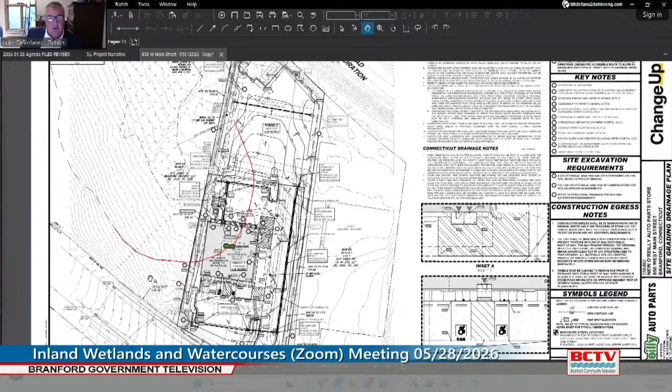So this is the site, and the red line is the area that I consider to be the major talking point for this evening. The site is proposed to be redeveloped as an O'Reilly Auto Parts store with a single access to and from West Main Street in front of the site. The back portion of the site is going to be subdivided off, creating 2 parcels. The site under the current condition is just shy of 2 acres. It's not going to be subdivided directly in half, but it'll be pretty close, with slightly more land given to the O'Reilly and the back half being used for...

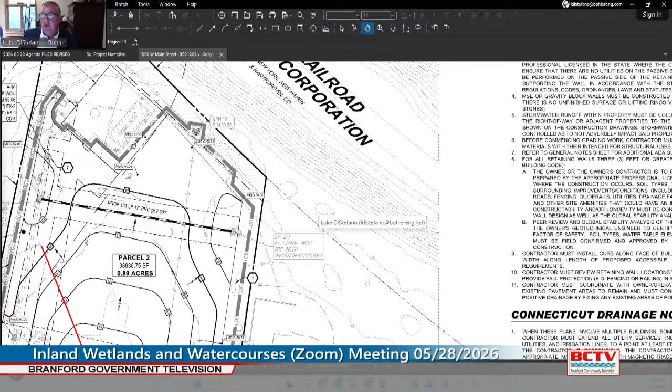The site, as I mentioned, is basically 100% developed today. There is also a cell tower located in the back portion of the site, that's existing. We're not proposing to make any modifications to the cell tower located in this portion of the site.

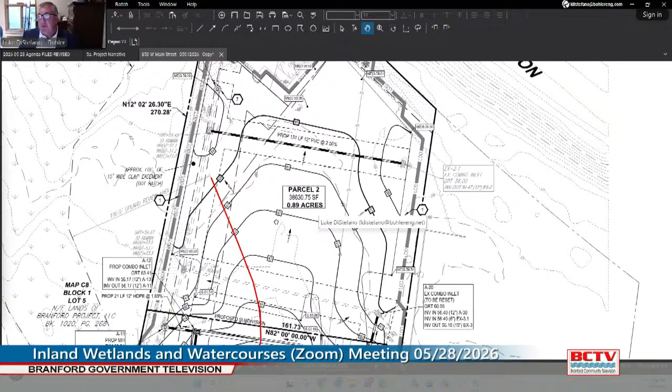As part of this plan, if you've had an opportunity to review the application or the plans submitted, we feel we're making improvements to the site that will actually enhance the wetland under the post-developed condition. We're increasing green space overall when you compare existing and proposed impervious and pervious cover, there'll be an overall increase in green space. Most importantly, we're enhancing the stormwater management system on the property.

Right now there's only a little bit of stormwater quality and stormwater management happening. But if you've had an opportunity to review the plan, you'll see we're collecting runoff from all impervious portions of the property, which will be collected via deep sump catch basins, conveyed to a proprietary stormwater quality unit before ultimately being discharged back to the wetland, similar to how it is under the existing condition. We've done some soil testing and identified D-type soils, so unfortunately the soils on site aren't conducive to any real infiltration, but we're looking to improve the site to the greatest extent possible.

Again, we're in front of this commission because we are doing work, about 18,000 square feet of work on the 2-acre site will occur within the 100-foot buffer, and that is why we're in front of the commission this evening.

So with that, I know you guys have a pretty full agenda, I'll open it up to comments from the commission. We did receive some comments earlier from town staff, none of which we think are major or insurmountable. We also have a meeting set up with the Planning and Zoning Commission happening next month, so we know there are additional reviews that will take place in connection with the project, but your commission was the first stop. I'm certainly happy to answer any questions the commission or anyone on the Zoom call may have.

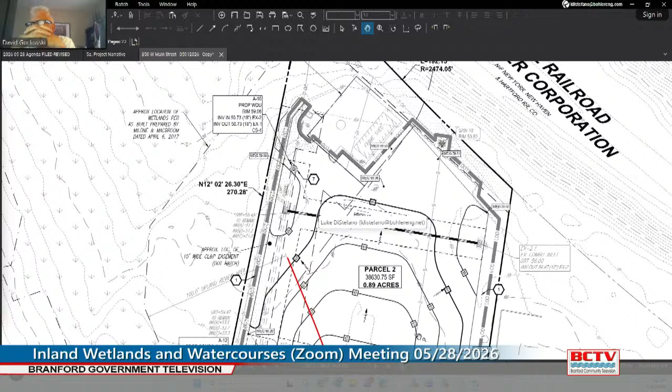Good evening, Mr. DiStefano, Commissioner Goklowski here. I'm under the impression you're going to be removing the existing structure on the property? Correct, everything on site will be, with the exception of the cell tower, razed and removed.

I'm very familiar with the history of this parcel, and there were some sewage issues, piping and sewer issues at one time when they were in operation.

Are you going to be removing the old plumbing currently on that structure? Correct, that'll be removed, new sewer line installed. Okay, thank you. You're welcome.

This is Commissioner Basserman. Can you go over the construction activities for the removal of the facility, and what protections are going to be employed to protect the wetlands during this removal?

I can't speak specifically to the demolition practices, that's means and methods, but it'll be a typical demolition by a licensed contractor. We have a soil erosion and sediment control plan that we submitted with the application, so we'll have safeguards in place to prevent sediment migration, erosion, or any pollution making its way into the wetland during construction.

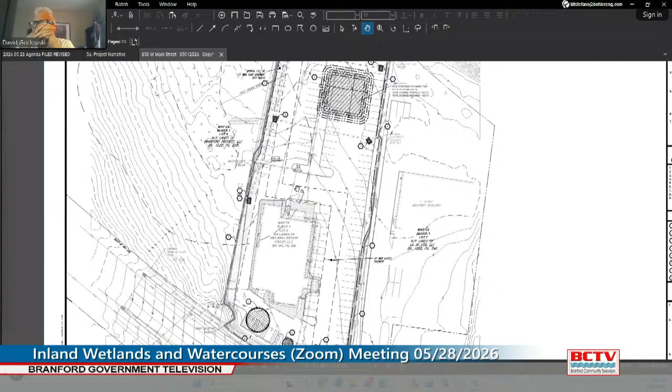I had a quick follow-up question regarding the rear parcel. I believe as part of this proposal it's proposed to be crushed stone or gravel, and there will be some catch basins installed in the rear. So I was curious what that would look like from a durability of the catch basin frames standpoint, and also from preventing stone from entering the system.

It's possible that post-construction, if it is left as a gravel-based area prior to being redeveloped, like with any catch basin, there's a possibility of stone, but with the deep sump, 4-foot sumps in the various catch basins, and a long-term operation and maintenance plan, those will be monitored just like any catch basin on any active site. If it's identified that they're full or collecting debris or sediment, they'll be cleaned as needed, similar to any long-term operation and maintenance.

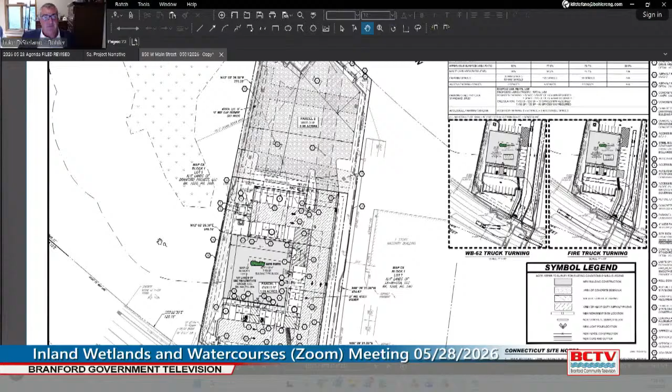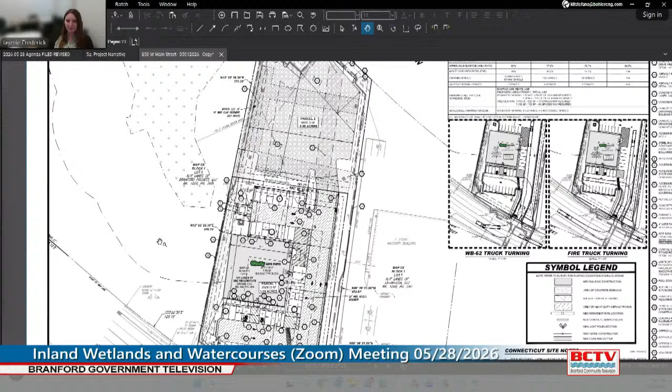Jaymie Frederick, the Wetland Agent, just to follow up, for clarification for the commission, the town engineer did get review comments in on this application that were distributed to the applicant today. I was not able to draft a staff report. Olivia put a lot of legwork into starting one, but I didn't feel it was as comprehensive as I typically like a staff report to be before releasing it to the commission.

I wanted to backtrack. I know one of the town engineer's comments was regarding the stormwater quality manual, and essentially the fact that the maintenance identifies 2 different options for the maintenance. I was wondering if the applicant could speak to that. I know you mentioned you saw the comments. Did you have a plan to resolve that point in particular?

Generally, we leave that up to the various commissions. Traditionally, 2 times a year is plenty for inspections of these types of systems, these stormwater management items or BMPs. If quarterly is preferred, we can do that. That's not a problem. For a site like this, the size, the type, the operation, we don't feel quarterly is necessary, but if it's 4 times a year, that's fine. If it's 2 times a year, that's also fine.

What's in the plan today regarding the maintenance? It mentions 2 different time frames for different portions of the BMPs in place. I think the catch basins are quarterly, and I believe the stormwater quality unit was twice a year, but if you want one uniform inspection rate for the entire system, that's fine.

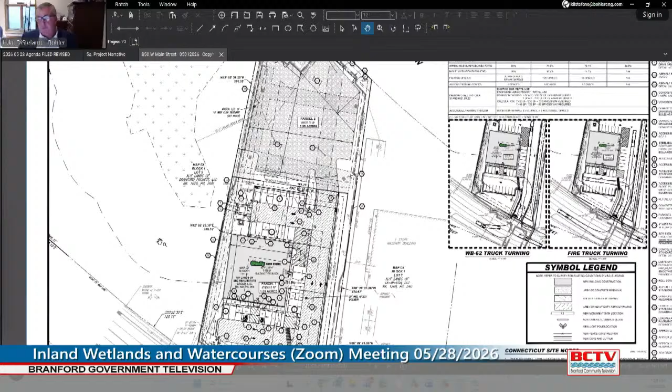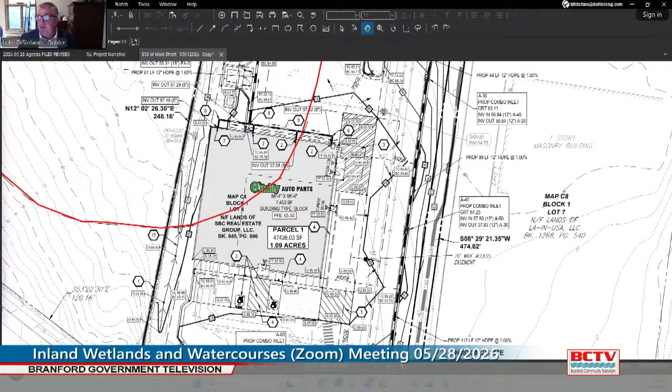I guess I'd like to see that visually. So if it's on this plan, can you blow it up a little more? It is, again, it's going to be difficult to see. Let me see. We don't always show the actual catch basins, but you can see right here what we've done. This may differ slightly from what's ultimately constructed in the field, but you can see all the runoff from the roof is directed into a series of downspouts on the north side of the building. That'll be collected and conveyed into the stormwater management system here prior to making its way southerly into the water quality unit and then ultimately back into the wetlands.

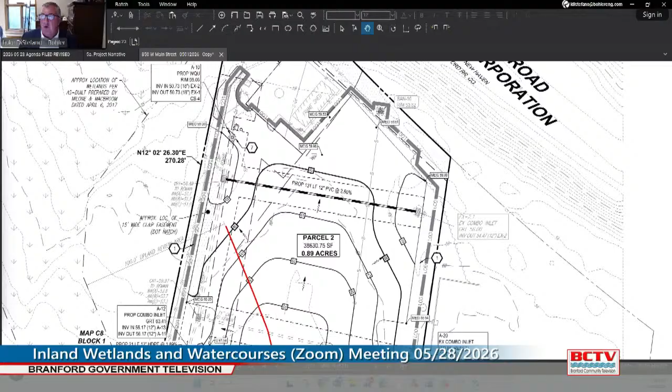So even though the runoff from the roof is, quote, clean runoff, it'd still be pre-treated like runoff from the other impervious portions of the property will be. So it's another safeguard over the existing condition.

This is Commissioner Bassermann. I'm a little concerned with the comment that what gets done in the field may be different than the plan. The architect may change where the downspouts are on the roof, but we will still collect 100% of the roof runoff and treat it the exact same way. Visually, we're showing it with 4 downspouts on the north side of the building, which we believe to be how it will ultimately be constructed. But it is possible that between now and when they build that building, the roof line could change, the gutter locations may change, but it doesn't change the intent of the stormwater design and how all runoff that hits that roof will be ultimately treated prior to being discharged into the wetland.

This is Commissioner Goklowski again. You said you're going to improve the impervious conditions on the property. What are you going to do with the second parcel? Are you including what your plans are with the second parcel, or are you just concentrating on the parcel that is going to be developed at this time? No, we looked at the entire site as if it was being developed. We knew it was going to be developed at some point, so we've designed the stormwater management infrastructure to handle 100% of the current site, with the rear portion of the site being effectively almost 100% impervious, which is what we looked at when we considered the overall site.

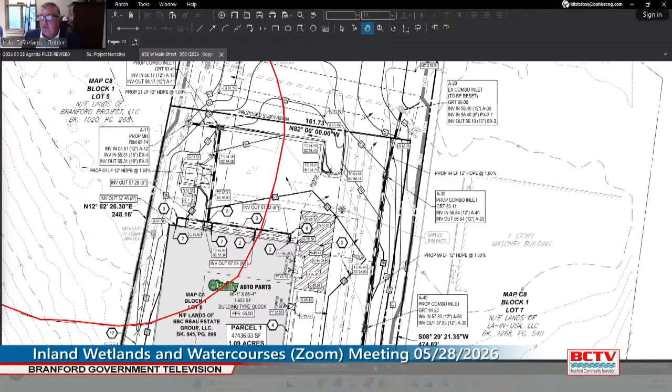This is Commissioner Bassermann. Is there any stockpiling on the site? I'm sorry, could you repeat that, sir? Is there any stockpiling on the site? We showed some areas on the sediment and erosion control plan for potential stockpile. That's going to be up to the contractor, more of a means and methods thing than anything else. But we did show an area for stockpile here, surrounded by erosion and sediment control fabric, so that if they do stockpile, similar to any other construction site, it'll be monitored and done in such a way that it prohibits any type of soil migration or sediment movement offsite.

This is Commissioner Begman. You're going to take up a lot of old asphalt. Can you speak to where that's going, if it's going to be stockpiled, if it's going to be brought off immediately, where it'll be stockpiled, et cetera?

Again, that's a construction means and methods thing. That'll be up to the contractor chosen to demolish the site. I could tell you in other locations like this, it'll be taken off-site unless it can be reused as fill or structural fill. But generally, that type of material is taken off-site to an approved disposal facility and disposed of according to all federal, state, and local regulations.

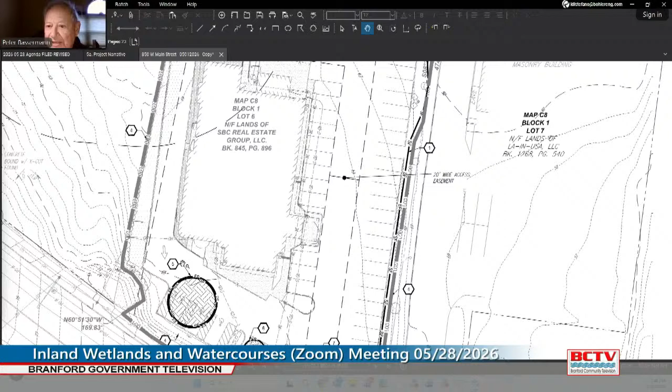And again, I'd love to be able to speak to other applications and other applicants. I don't know if those applicants had contractors already chosen, if they had preferred contractors that do all their work. Again, there's a lot of variables. I've been designing and permitting sites in New England for 31 years, and in 99% of the instances, this level of detail on plans is more than enough, whether it be inland wetlands, whether it be planning and zoning boards of appeal.

But again, we're not looking to dodge the question. I'm just telling you at this point in time, we don't have that information, but we're happy to provide it when we can. Jaymie Frederick, the wetland agent.

I'll just speak to that point. I think the main concern the commission has relative to stockpiling is the extent of stockpiling on site. Oftentimes plans will initially come and they'll have a small circle, and then the site development comes and it's a much larger stockpiling area. So I think the main concern is whether the stockpiling area is appropriate for what's likely to be stockpiled on site. And the other question is whether asphalt millings will be stored on site, because oftentimes the commission will want to see that maybe be a covered stockpile to help reduce leaching of chemicals from the increased surface area of the millings.

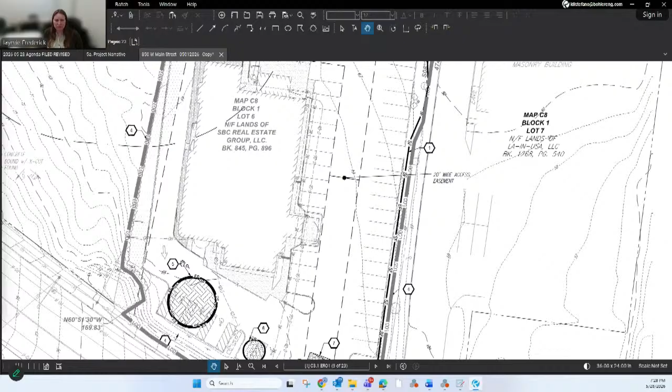And the main thing for consideration is making sure that the stockpile doesn't move in proximity from where it was proposed on the site plan to the wetland, and also that we don't end up with stockpiles on top of catch basins, which ultimately drain into a stormwater system that goes to a wetland area. So I think those are the concerns the commission's looking to address.

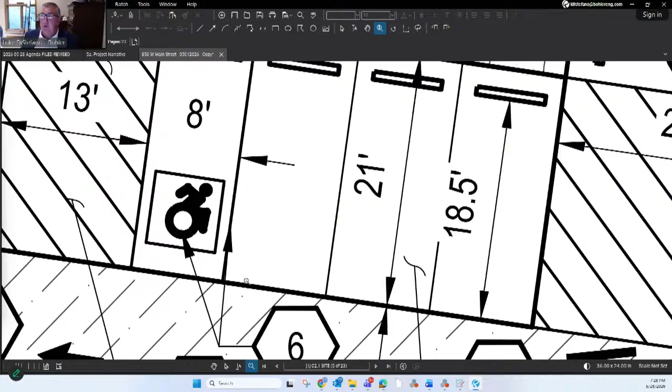Well, my computer's not behaving here, but I can tell you when we lay these things out, obviously we put the stockpile as far away from the wetland buffer as we could. We also have to remember this is a very small property that's being redeveloped. It's currently 100% developed today. We are not modifying grading and drainage to any great extent.

So we don't anticipate huge stockpile areas on site. This isn't an undeveloped site where we're going to be coming in and cutting into huge slopes, that type of thing. We also have a site that is very tight for everything that's going to be happening. When you consider there's going to be construction equipment, they're going to be putting in a building, there's not a lot of room to be maneuvering around here.

So we place the soil stockpile area in an area that, in our opinion, is as far away from the wetlands as it can be. It's going to be in an area that's conducive for the contractor, so that it doesn't interfere with other construction activities or equipment occurring on site. But we're certainly happy if there are certain requirements the commission would like to see, such as some type of material underneath any stockpile, or additional provisions beyond what we already show on the soil erosion and sediment control plan. We're more than agreeable to having those added to any condition or decision the commission sees fit to offer this evening or at any appropriate point.

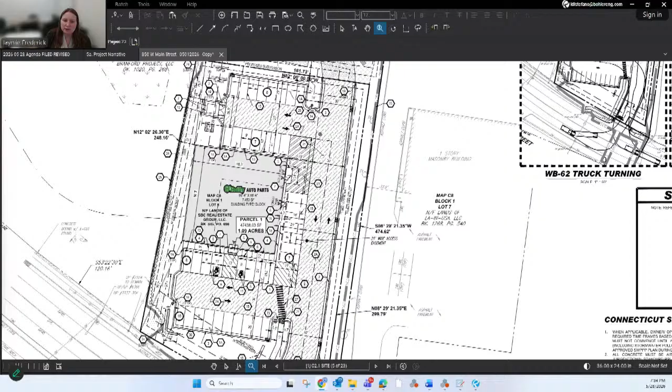This is Commissioner Bassermann—it sounds like it's not ready for prime time at this point. There needs to be review by both wetlands and planning and zoning, and you're kind of wearing both hats these days. So I'm going to make a motion that we table 26-16. Before you do that, Peter—yes. Can I interrupt you and stop you? I just want to point one thing out and see if any commissioners have other questions, so that if we continue this, hopefully everything is ready to go at the next meeting and the applicant can move forward without being held up. So I want to point out a couple things, and perhaps give the applicant a moment to address any follow-ups they may have before we continue.

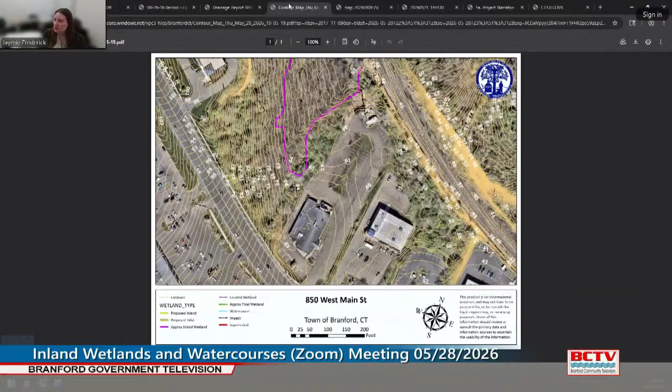So Olivia did two GIS maps, which are in the application. She's got one with an aerial image and some contours and the offsite wetland area that was delineated as part of an application for the abutting property. We do not have a wetland delineation, but there is a wetland area to the rear of the property to the east as well, approximately in this area. It is off-site, so we wouldn't require the applicant to delineate it.

I do have a couple of photos from when I went out to the site. You can kind of see the backside of the lot, by backside I mean the side opposite the entrance. And this is the property line that abuts the wetland area you see here. So this picture we were just looking at is approximately in this area.

It does look like the wetland might be a little bit more extensive. Again, it appears to be mostly off-site. I'm not entirely sure if there's a little bit of wetland area that perhaps extends onto the subject site. Presence of phragmites is not a wetland indicator, but the plant does tend to grow in wet areas.

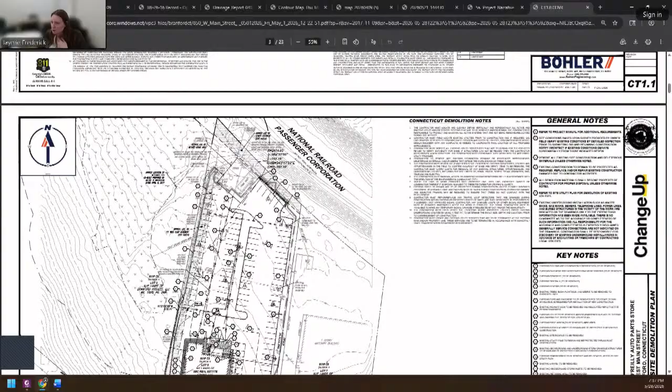Commissioner Besson: Jamie, that last picture you had, how close is that to the property line, since you said it's off-site? Jamie: Honestly, I'm not entirely sure. But this catch basin here... Commissioner: Yeah. Jamie: ...is this catch basin here. Commissioner: Oh, okay.

But I will note that when I was out there, there's a very small portion of this lawn that seems like it would be graded to potentially flow to this catch basin, and the rest of it is graded away from the subject site. And that's shown in the watershed calculations.

Any questions on any of that from commissioners?

Commissioner Bassermann: Would it be your intent, Jamie, to put those questions and comments into some document and forward that to the applicant so it can be reviewed for the next meeting? Jamie: Certainly, we'll follow up with the applicant. I'd also like to provide them the opportunity to see if they have any comments or questions while we're all together.

Commissioner Begman: I like the idea of the project coming back when the contractor is known, so we can be told what the erosion controls and sediment controls specifics would be. And I had a question, is there a provision for where in the paved parking areas the snow removal will go, and where the snow piles are going to be piled? That's a question for the applicant.

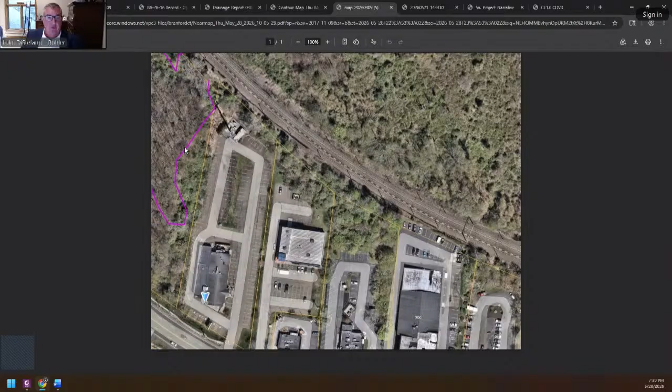Well, I believe the snow storage areas were shown on site, but I'll make certain that when we come back they will be, if they are not. But generally they'll be in landscaped areas as far removed from the wetland as we can, unless it's a specific requirement by the commission that there be no snow storage within the buffer, in which case we would keep it entirely outside, but generally it's going to be in landscaped portions of the property around the perimeter.

And then again, in instances where we have tighter sites like this, if the commission deemed fit, we have in the past agreed—I can't say we would right now, we'd have to take a look—but we have agreed to have snow removed entirely from properties during heavier storm events. Traditionally though, we're able to find plenty of room to mitigate snow and keep the site operational at the same time.

I would, however, ask about that comment you made relative to coming back once a contractor is chosen. I'd prefer not to have that as a condition, because we don't know when a contractor will be chosen.

This site, depending on how long it takes to be permitted, funding—we have no idea when a contractor will be chosen. But I can tell you, despite a contractor being chosen, if there are specific issues the commission wants to see, or specific items put on a plan, or conditions in any approval, we're happy to deal with that. It's not something we're looking to shy away from, it's just something that right now I can't provide.

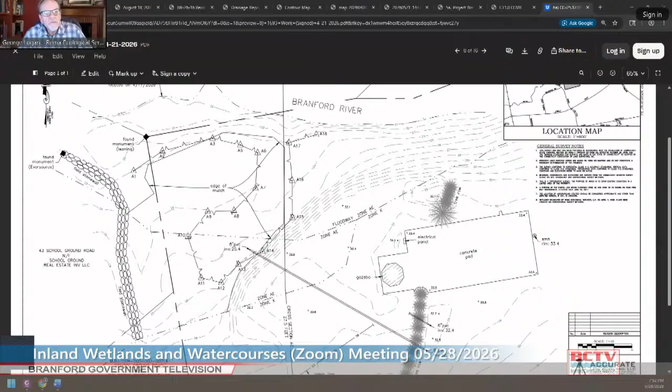within two features that are regulated by, I guess, the federal government and also by extension, the town itself. So the first thing I want to point out is that there is a vertical line you see that goes from top to bottom, this cross section, and it has an elevation on it,

and that says 27.5. That's a sort of an indexed line that came directly off the FIRM FEMA maps, which I've also looked at, and so our surveyor was able to put it as close as possible to where it is. Then you will see two other lines that kind of join together right there.

So you have a floodway, and that's the line that goes east to west, roughly. And then off that, the Zone AE diverges, and that's the floodplain line. So that's a 100-year floodplain.

Now, in talking with the town engineer, and Jamie, I think, also has had a discussion with him, there are two issues here. The first issue is that it cannot happen that we have fill within the floodway. That's not allowed. So if that mapping is correct, then that portion of the fill would have to be removed.

As far as fill within the floodplain itself, that's the Zone AE, which is based on an elevation. By the way, the elevation is roughly plus or minus a few inches on the site, maybe a foot, maybe a half a foot, 27.5 -- you can see that we don't exactly match 27.5 on the east side or on the west side.

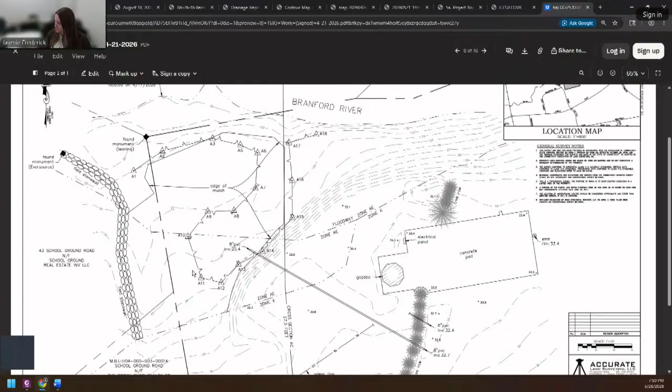Now that I think we have all the appropriate parties, so just for clarification on 2614, 509, before we move on, just for quick clarification, continuing the show cause hearing to the June 11th meeting. Correct. Okay, thank you.

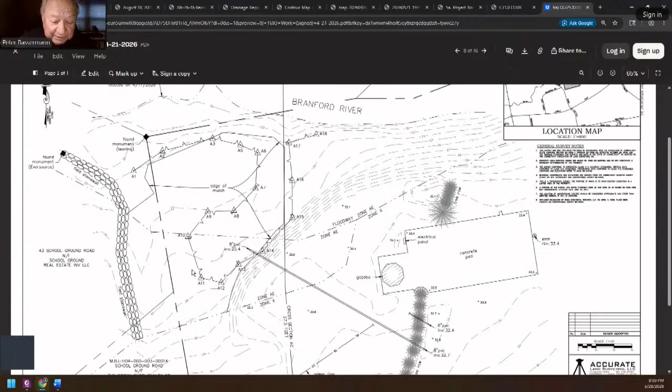509, 545 East Main Street, and 6 to 12 Business Park, installation of a swale, which is a continuation of the May 14th meeting. Let's see, we have all the parties on board. Let's try this again.

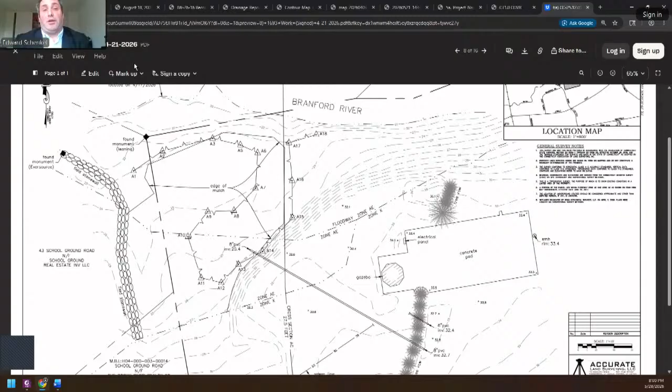Good evening, Edward Schenkel for the applicant 509 Branford LLC. I'm here with Mr. Stephen Trinkus, our professional engineer, and Mr. Foss, our LEP, is also here, available for questions. I'll speak quickly and then turn over to Mr. Trinkus. But I can represent that I have spoken to Attorney Deacon, who is counsel for the other applicant, the co-applicant, 612 Business Park Drive, Stony Creek. And he did state that Mr. Brown and Mr. Clutch are not pursuing those concerns that they raised before and that they will not be attending the meeting tonight, which they are not. I can represent that to the commission.

To the extent that Mr. Brown's comments need to be addressed, I'm going to turn it over to Mr. Trinkus, who can talk about that and answer any other questions for the commission. And then I'd like a few closing remarks as well. Sounds like a plan. Okay.

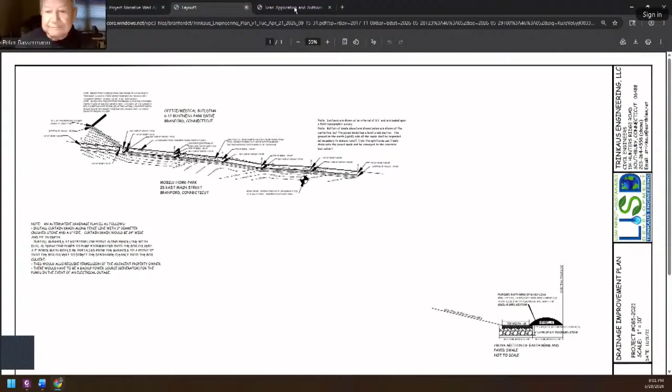Steve Trinkus, for the record, professional engineer from Southbury. A lot of Mr. Brown's comments dealt with more of the stuff on the Clutch property. He did at the meeting ask, could you infiltrate water farther up on the site? Our LEP did provide a map to staff showing the extent of the impermeable liner above the questionable environmental fill that was used here.

But you just can't infiltrate on this site, even above the liner, which goes about halfway up into that field. When we did the site walk, we parked on the lower driveway, and when we looked uphill, that lawn area, the liner appears to go about halfway up between the roadway and the units on the north side. But even if water infiltrated above that, it would have gone underneath the liner and into that contaminated fill, which is what you don't want. When I was on the site a couple of years ago, these lawn areas, while they are lawn, the soils are also very compact, pretty much almost one step away from being pavement, so rainfall just runs off of them. It's not infiltrating.

We went over the swale in the field, which is basically to provide a smooth, uniform flow path from the western end of the mobile home park, heading back east and then turning into the end of the box culvert, so that rainfall falling on the mobile home park as it runs down to the southern property line will now have a path that it can flow and get into the box culvert, and basically eliminate the flooding that has occurred in this lower end of the mobile home park. That's the whole purpose of the swale, is just to provide a smooth conduit for the water to get from point A to B.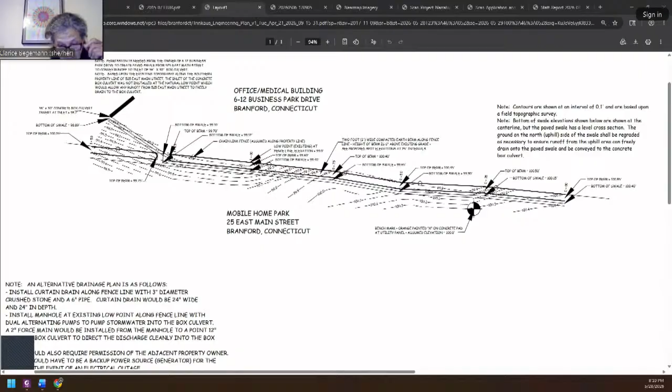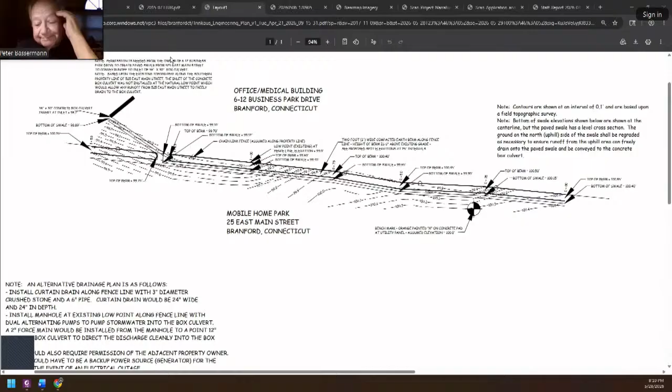Jamie, this is Commissioner Bassermann, you have a staff report for this? I believe we went over the staff report at a previous meeting and continued for the site walk, so I'll skip over. I think the other thing of note is the erosion controls and how the inlet, the culvert, box culvert will be protected during the construction of the swale and associated berm.

The outlined recommendations in the staff report are required inspections for the stormwater drainage structure, installation and final inspection, which would probably happen at the same time, standard conditions and general provisions in the issuance of all permits. I think based on the discussion this evening, the commission might want to also add a condition such as maintenance details as outlined at the May 28, 2026 meeting by the project engineer shall be added to the site plan. And then I don't know if you want the engineer to refresh the commission on how the box culvert will be protected, if there's any measures that should be installed, and what that would look like relative to the plan.

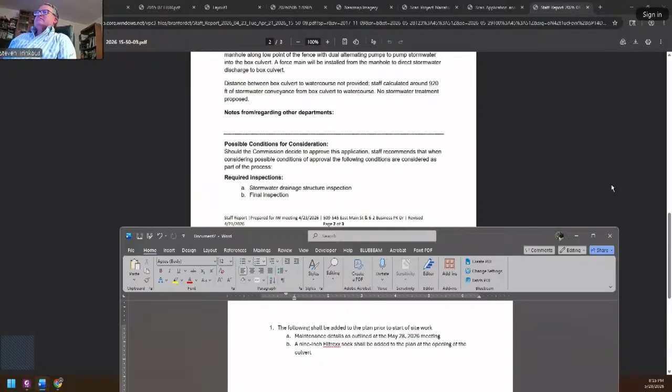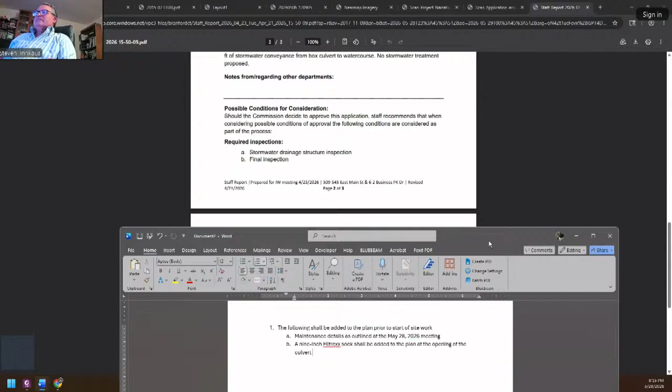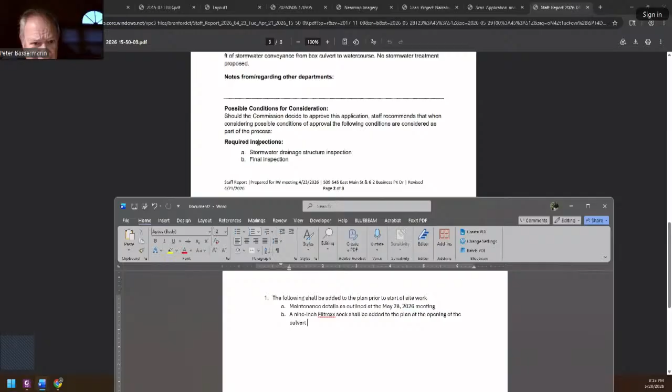This is Commissioner Bassermann. So Jamie, I understand this would be under possible conditions for consideration number 1, and then required inspections would be number 2 or something? You know, typically, I think based on Olivia, maybe you can help me on this one. I think required inspections might be condition 1 in our new system based on our template, so maybe this would be condition number 2. Do you recall, Olivia, how it's structured?

I think maintenance would be number 1, and then the Filtrexx sock would be number 2. Do we count the required inspections as a condition? No, but I don't know if the commission wants to see a revised version. Prior to start of work and following shall be added, and shall be reviewed and approved by the duly authorized agent. I think that's the information presented this evening, so it's just a matter of making sure. Sometimes we need an erosion control inspection, I didn't put it there when I was initially drafting it because there were none proposed, so I'm not sure if we want to add that.

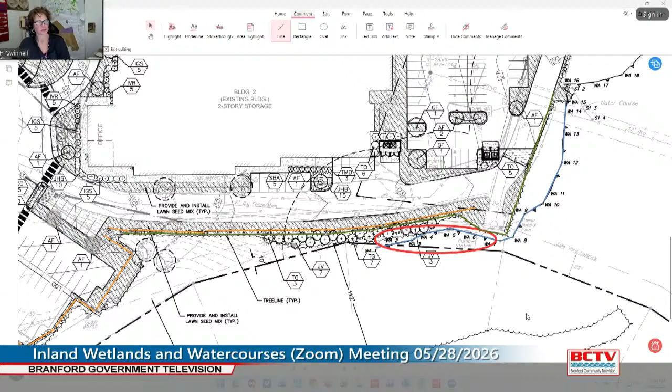Yes. Okay, so there was some discussion that some trees needed to be cleared. Jamie had conversations with the project manager at the time that they would be limbed, and I specifically asked, when do you guys have that planned? This was during the wintertime, there was still snow on the ground. They were not ready to schedule it at that time. However, I was informed that they would reach out and give me a heads up so I could go see the area that they were actually going to clear.

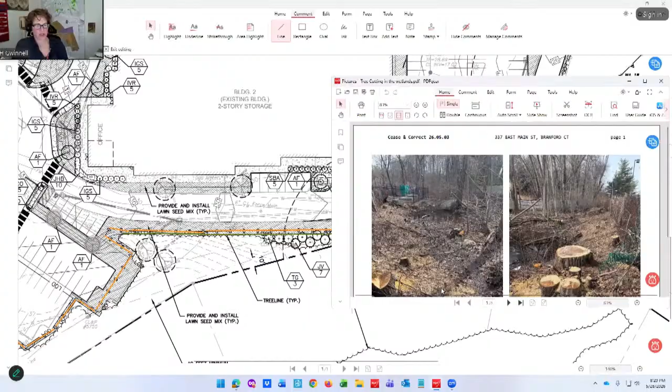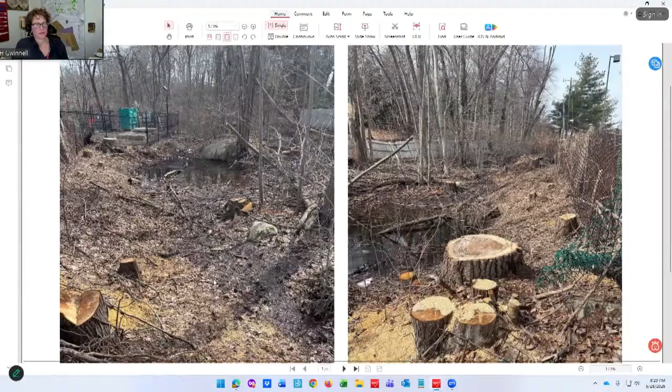Probably a few weeks after that, I hadn't heard anything. I was again doing a routine inspection, and when I arrived, this entire area was not just limbed, it had been cleared. So I do have some pictures. This is what I saw when I went after. This is where the trees had been that we were informed would be limbed. This was the result, and it obviously went deep into the wetland area.

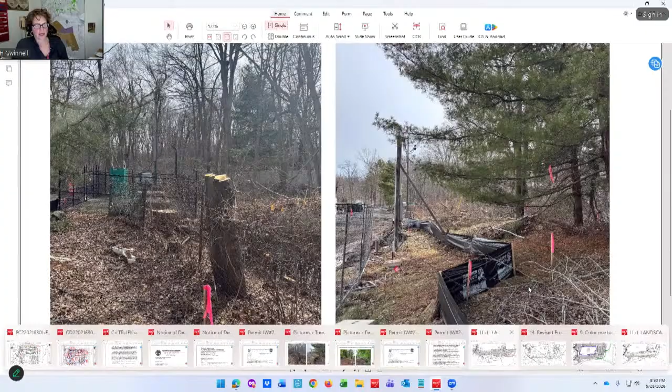I did have conversations with the superintendent on site, the previous one, they switched out, the new one, and the different project managers. So everyone was aware that this was something that was going to have to be addressed, and that they would be receiving some kind of a cease and correct order in order to remedy this.

The follow-up, what you're seeing now, is slightly different than the previous one. I think if you can see this, we have the orange line, which is actually a fence. In the last 4 days, the fence has moved, or has begun to be installed. Again, there was a conversation before this sort of went in, saying why are we putting the fence over here. So I also would like to bring up to the commission that during this discussion of the wetland area, they also altered the direction of the fence, which I have pictures of here.

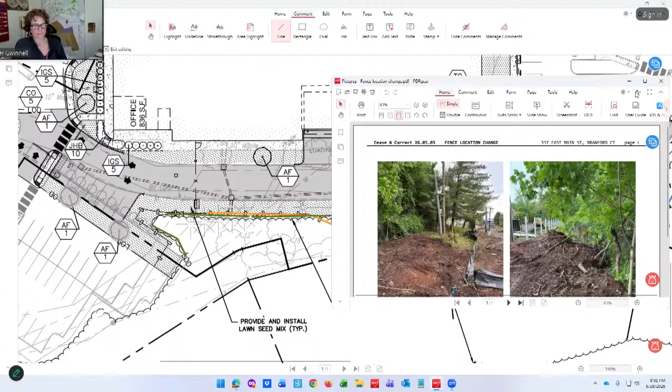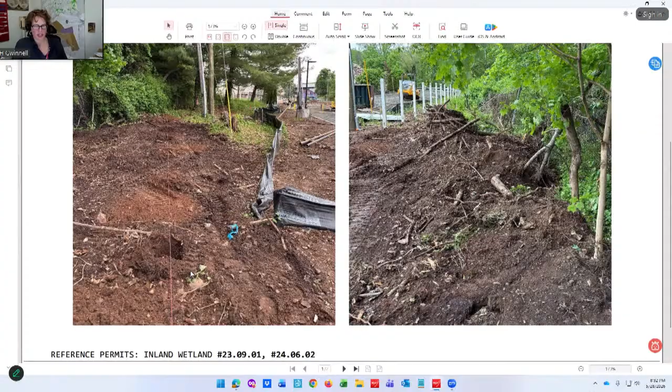So if you can see this pink line, this is from when I went last week, Thursday afternoon, and this had all been cleared back to here. And you can see over here, some of the fence posts had been put in, they were concrete. I did inform them to stop what they were doing, that this had not been requested, no modification had been requested, this plan had not been submitted to install the fence in that configuration.

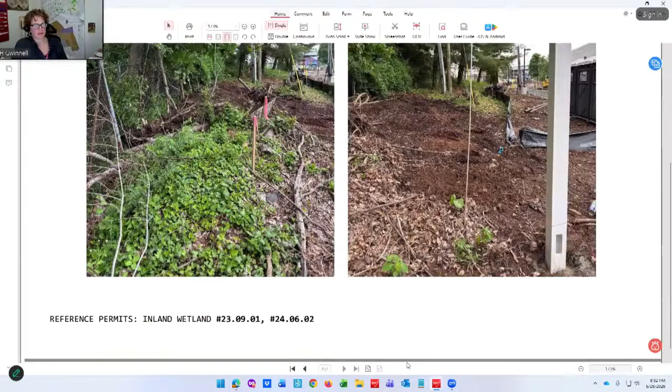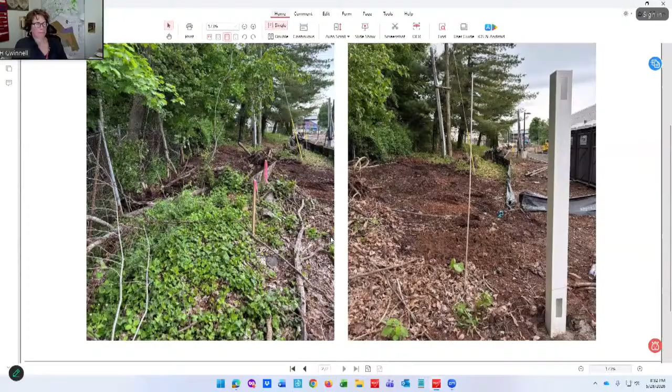Commissioner Basserman, go back to the previous set of pictures. The clearing or the trees? The fence that you had up, the white fence on the right? Yep, the one before this. There you go. But were those posts put in after the issuance of the cease and correct? No, because the cease and correct was issued on the 26th, 2 days ago. So I told them, I had communicated with them that Thursday afternoon that they needed to stop.

I had been in training last week, so I was not available. I stopped by here on my way home because I know the site has a lot of activity, and we had a tremendous amount of rain.

I informed them to stop what they were doing with the fence. Since then, the posts had been put in and concrete poured around the bases, and some of the paneling, if you can see way back here, you see some of these white posts in the back, the fence has been installed on those. I was there yesterday afternoon, and these posts are now in, but I didn't see any fence paneling up.

Can you go back to this, Commissioner Basserman? Can you go back to that site plan that you started with? The original one. This is the current one.

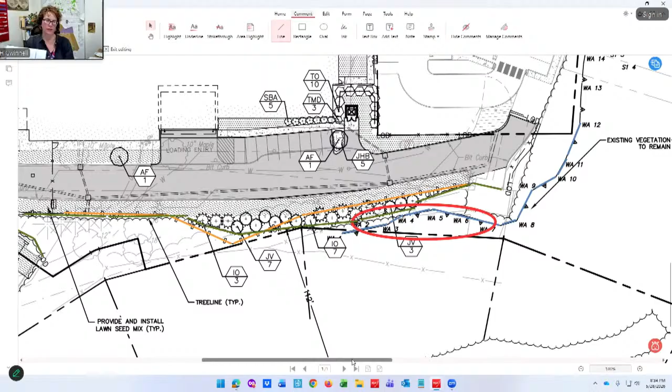I guess I'm looking for where the wetland is, where the delineation is on the wetland. Sure, well this has not changed. This wetland line has been the same since this was the plan approved in the original permit, and this is the landscaping plan that the landscaper was actually working off of, which only came into existence, I believe, in February. That was February, January of this year, versus the initial permit which was issued in 2023.

And Commissioner Basserman, is it wetland 2 that's at the end of that red circle? Yes, that's wetland 2. So wetland 1 is here. Wetland 2 is over here. And it just abruptly stops?

I'm not the wetland scientist, this is based on the Frederick plan. And the wetland agent noted that's the property line right there, so it's typical for wetland lines not to extend beyond the property limits. Say that again, Jamie. I'm sorry, I didn't hear. That's the property line, so wetland flag 1, the call out for that is actually on a different property, so that's why the wetland line ends there. Oh, okay, all right, thank you.

It's kind of a mess. Yeah.

Do you have any recommendations at this point about how you feel we should proceed? Well, I think there are representatives of the assorted parties on the call. We had discussed previously that some kind of restoration plan would probably be requested by the commission for the area that was cleared. Beyond my assuming that and telling them, I haven't really given them any further information because I'm not sure what the commission wanted, what direction they wanted to take.

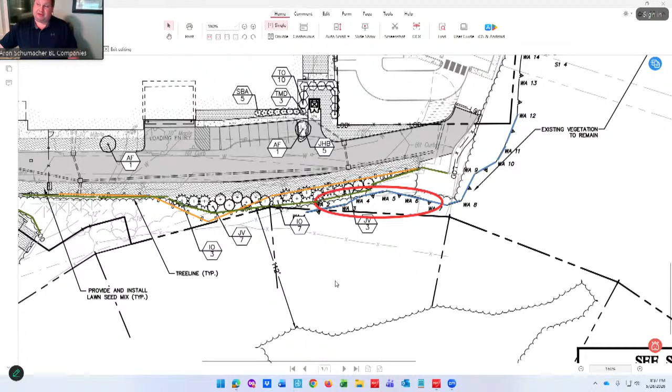Thank you, Commissioner, Mr. Chairman. For the record, my name is Aron Schumacher, professional engineer with BL Companies. Unfortunately, John Schmitz, who handled this project before you guys through the permitting process, had a conflict tonight and could not be here. But I worked very closely with him on the project and was actually the engineer of record for the original design.

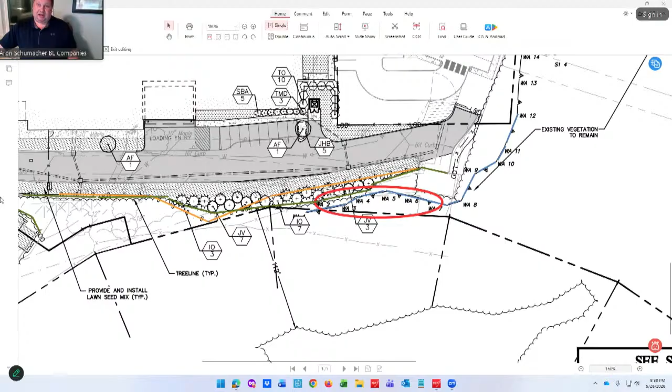If I could, is it okay if I share some plans that we have highlighted? Is that okay with you guys? Yeah, certainly. I would just request that materials that haven't been submitted, if you could submit them for our records. Yeah, there are plans that have been submitted to you guys, I just highlighted them is all I did. I can send them to you after the meeting if you would like. That'd be appreciated, thank you.

I also forgot to mention, on the call tonight is Jay Tillmon, a representative of the owner, Premier Self Storage, and Mike Butcher, the general contractor on the job. If you have questions for them, they can chime in. So this is the original landscaping plan that was approved by the commission, and the things I highlighted are just the wetlands areas highlighted here in blue. The yellow highlight is the approved limits of clearing.

And then the green highlight is the proposed landscaping along this edge of the driveway, which consists of American holly and eastern red cedars. The IOs are the American holly and the JVs are the eastern red cedars.

And then this line that falls off the edge of the pavement is the original location of the approved fencing that was discussed earlier.

So what happened throughout this project is getting power to the building and working with Eversource. After we got approved through you guys, we went through planning and zoning, and then we went to Eversource to get their approval on how we are going to bring power into the building. And they have a line that runs to the back of this building that serves the municipal pump station.

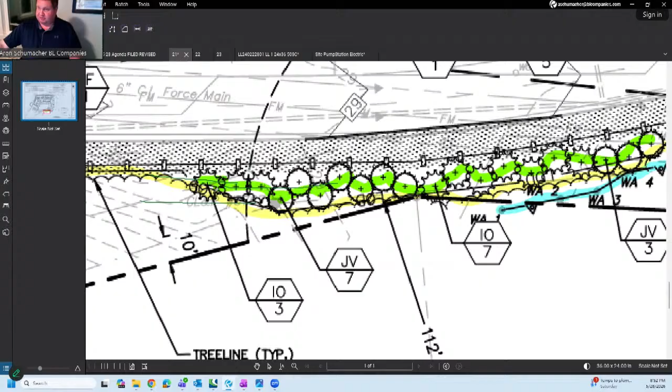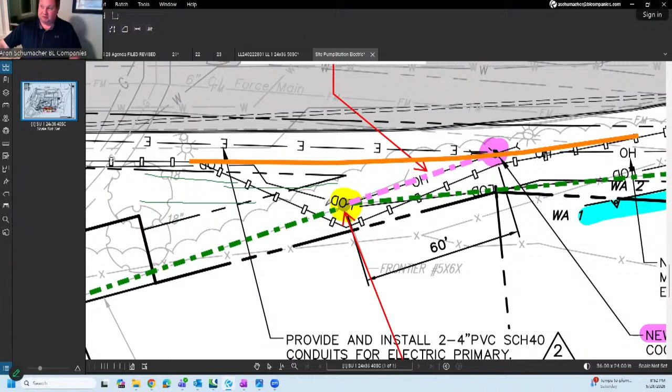Aron, I don't believe the new fence location is outside our limit of disturbance as originally crafted. Can you clarify that, Aron? Yeah, so I can show you guys that. If we look at the original plan, you have your tree clearing and your limit of disturbance that was approved as this line here. This is the fence line, and this is the limit, so it's within a couple feet basically. And that's nowhere near the wetlands, is it? That's further up, that's near. So this is the existing pole.

So the reason we put the fence is to go behind the existing pole, and it's set just behind the existing pole to give Eversource their access that they asked for.

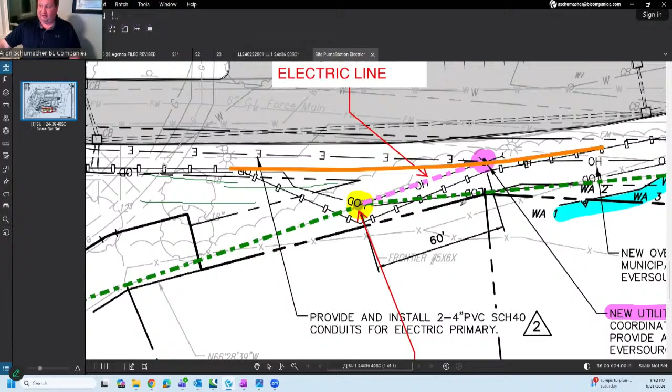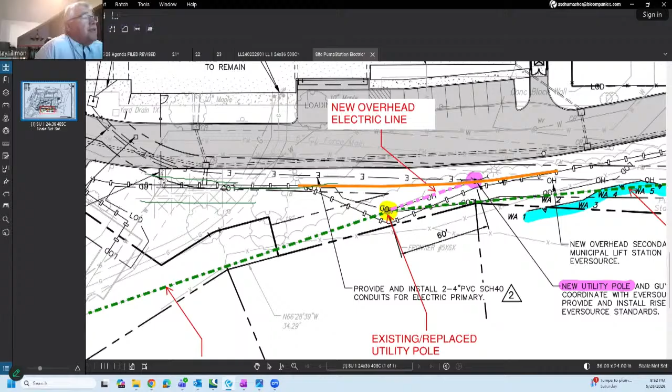I'd like to let the board know that we didn't remove these trees because we wanted to. It didn't improve our visibility, it didn't do anything for us. As a matter of fact, we had to pay to trim these trees for Eversource. I'd also like to point out that the movie theater received their power on the other side of the building, and we designed our project to also receive power over there. The fact that Eversource changed their mind after all the planning and everything that had been done and all the approvals that have been sought is beyond our control.

It ended up costing our company a change order of over $75,000 because Eversource changed their mind on how they were going to provide power to this building. So it wasn't anything that caused us to profit. If anything, it's cost us a lot of money and a lot of time, and it's certainly not anything that we did intentionally.

Heather Gwinnell, wetlands officer: when you're thinking about what the landscaping restoration might look like...

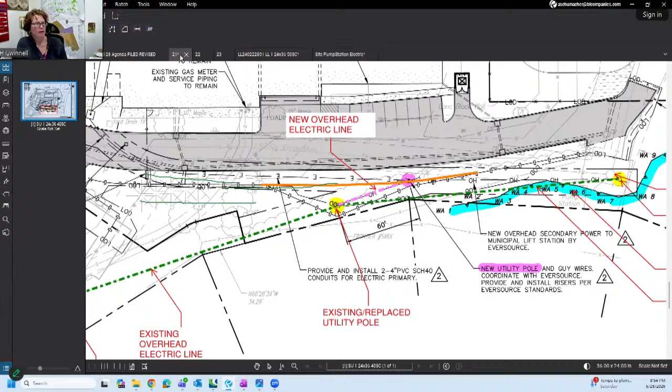Aron, you're sharing your screen now. I don't know if you can put up, if you had a landscaping one, I think. Because in this particular one, this is the original one that was approved, the one that was sent to me, and that is the updated, or version 2.

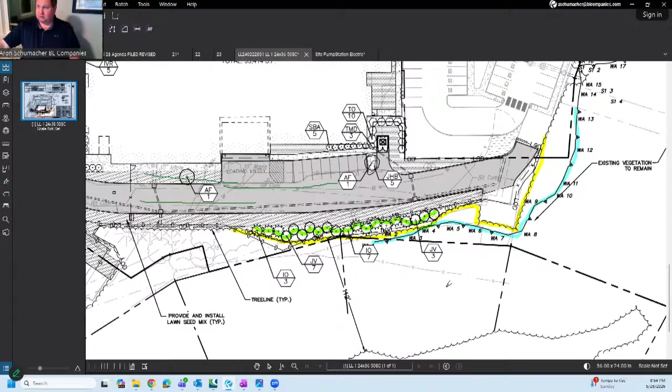Yep, right. Those plants appear to be behind the fence. Are you actually putting those plants behind the fence? And if so... that's an interesting plant choice.

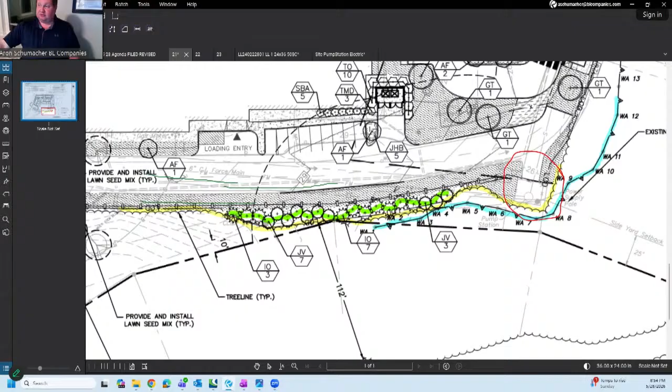These plants have not moved, right? So on the original planting plan, these plants were all planted behind the fence to enhance the wetland buffer, basically. So the change that's taken place is a series of them are behind the fence, on the wetland side of the fence, and then the fence is going to swap sides with them in order to incorporate that Eversource pole. I'm not sure there's a lot of area left over here for us to do additional plantings, because we already have these plantings proposed as part of the original approval.

Jamie Frederick, the wetland agent: I think relative to the change in limit of disturbance relative to the new pole, there's not much to do. My question would be relative to the clearing that happened in the wetlands. There's no plantings proposed in that area. Has the location of the clearing been identified to any extent relative to the wetland and the property boundaries?

As in field located by like a survey crew? No, but this line here is the power line, right? So it's 10 feet either side of that. I think my main concern would be like from wetland flag 6 to 2, that 10-foot offset.

It might be, I know BL has environmental professionals, including wetland scientists. It might be that there's enough there, but I think having some sort of analysis done to see whether there's anything that should be planted to restore some sort of shade canopy to that wetland area. I do know that the stumps were left in place, which was a good call as far as maintaining ground stability. But I think the commission would want to see some sort of assessment at the very least, and possible supplemental planting plan, with an understanding that there are limitations based on the power lines, particularly the older power lines that are low, to kind of offset that activity.

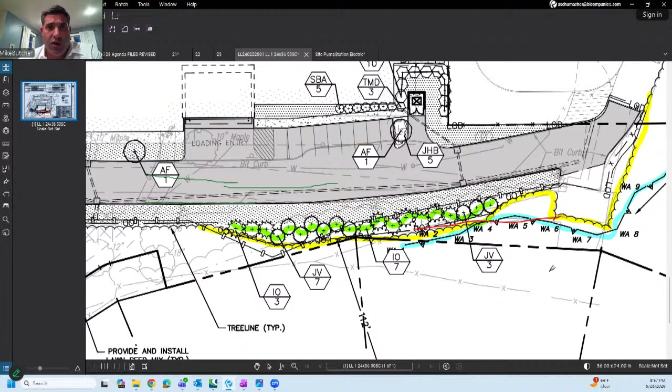If it helps, I can steal Aron's screen real fast and show you a couple of pictures right after the clearing, while the stakes were still in the ground, showing the limits of the wetlands and where our LOD is, just to show that I don't think it's as bad as some of the pictures look as far as how far into the wetlands and how much clearing was done. I can pop a couple of pictures quick if that will help. Sure, if you could email them over afterwards, that would be helpful too. I can, yes. So let me share my screen here.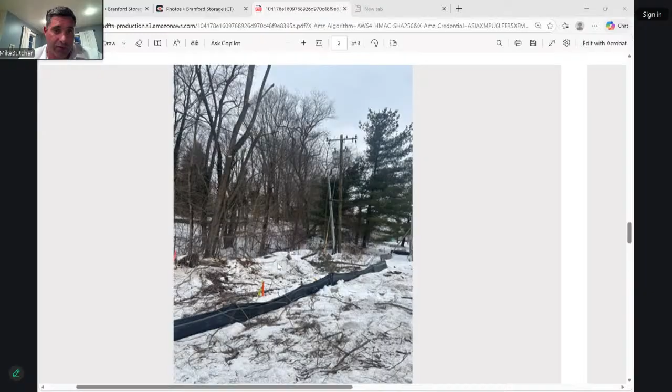So, obviously a couple other pictures, you can see the area. These trees here are some of the trees that were taken back. This is the new wire for our new feed, comes from this temporary pole - the new pole's in the same location. That wire comes straight through and across. So these couple trees here, in order for that wire to go in just 10 foot out, they had to come down. That's kind of the condition of what it was when the clearing happened.

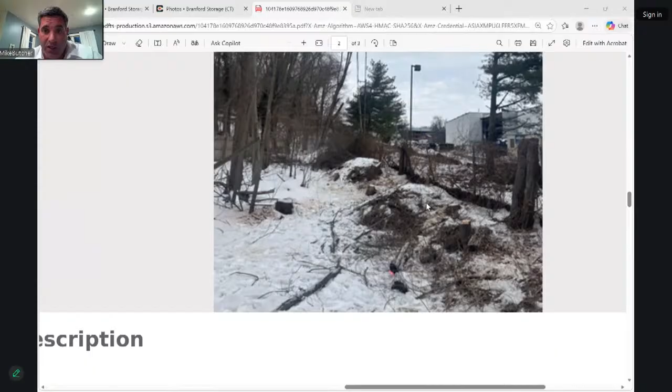Here's just another shot straight down the line, so you can see where those trees run. Everything to the left towards the wetlands, we did our best to just limb those back and get them to what Eversource would allow us to do. And then the trees over here that fall directly under the new pole, back outside of the wetlands area, right on the edge of our limited disturbance - that's where some of those trees just had to come down. They did the best they could to leave stumps and limit any ground disturbance in there.

Like the previous photo showed, so close to the silt fence, those trees that came down right there - that's also not in the wetlands. Correct, yep. And that's why in this photo here, I was just trying to show the line of the wetlands coming through here.

So I'll email those over to you as well, Jamie, but I just wanted to share those so you can kind of understand the situation out there. We did the best we could with Eversource.

Any thoughts from commissioners now that you've received a lot of information?

Commissioner Bassman: I guess, is the area now prone for invasive species to take over the area that was cleared? That would be one of my concerns.

That's part of why generally the commission looks for some sort of plantings and shading. Planting and shading do two things: one, by planting natives we have a native vegetative buffer, and by planting we provide competition for invasives. Shading protects the thermal characteristics of the wetland and also helps prevent invasives. So I would probably recommend a wetland scientist or comparable professional take a look at the area and provide a recommendation to address the activity that occurred - type, number, et cetera - relative to the constraints of the site. That can get reviewed and approved by the commission, then implemented. That would be my recommendation.

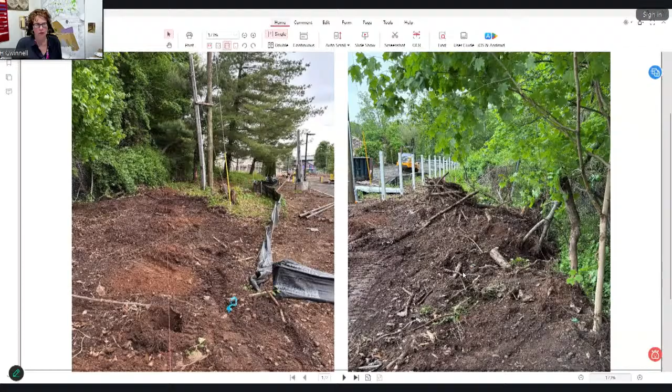So this area here on the back side where the fence is going to go along this line is, as you can see, disturbed all the way back. As far as I can tell, there was no specific plan for any of the plants to go back here. I could be mistaken, but you're probably not going to sod that area, and it is obviously ripe for invasives to move in.

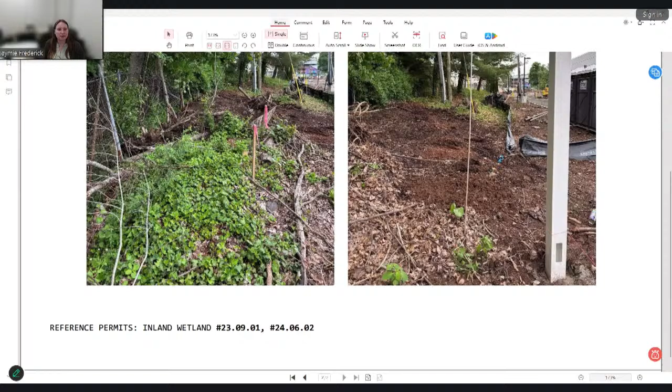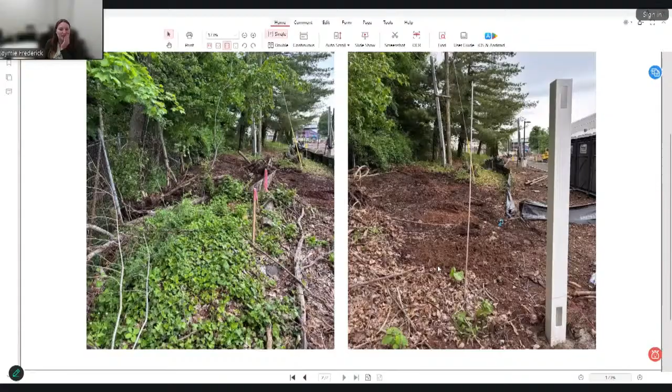I would suggest any excess material on the surface in that area should be removed. I don't know if those piles from the first pictures are still there. That area should be graded out so there's not just a pile of dirt leaning up against any trees, and then seeded with a conservation seed mix that's shade tolerant.

Aaron Schumacher from BL clarified that the area being looked at is where the proposed plantings that were approved are going to go. Any disturbed area not part of the plant area, beyond particularly any limits of disturbance, since silt fence is visible on one side and activity on the other, should be seeded with the conservation seed mix.

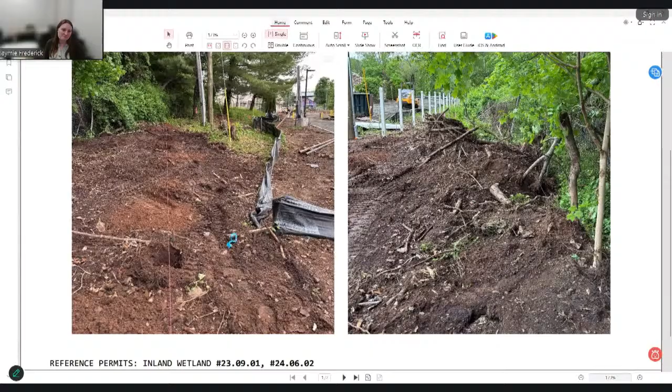Commissioner Basserman said that at the next meeting they'll also have a revised site plan of the new plantings, where they're located, what's going to be seeded with the appropriate conservation mix, the fence line, etc., so they can see the picture as it unfolds.

Anything else from the commission? Jamie, do you intend to send an email back covering what we discussed this evening for this cease and correct? I'll request that Heather does that. All right, Heather, and we're going to continue cease and correct 260503 until the June 11th meeting. Thank you.

Okay, we have agent approvals. Any questions from the commission for either Heather or Olivia or Jamie on the agent approvals? Hearing none, any correspondence or final comments, Jamie? No.